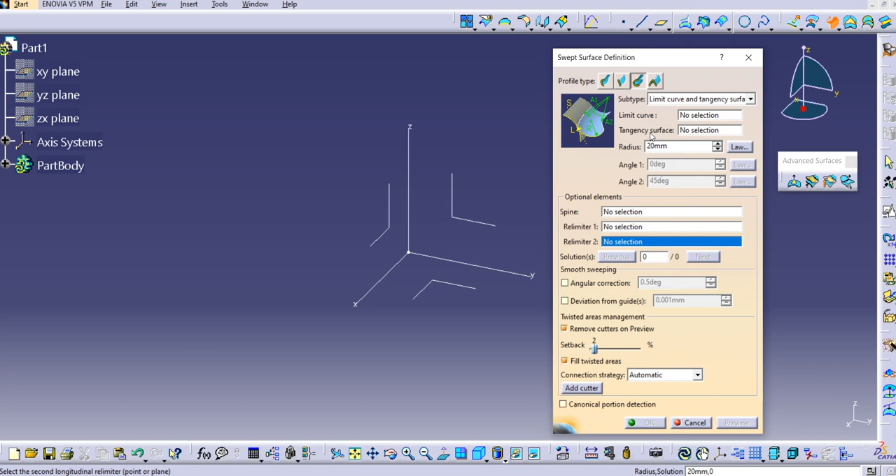L stands for limit curve. In this diagrammatic representation, L is the limit curve and S is the tangent surface. The radius we can provide based on requirement, and we can adjust these angles accordingly. Let's cancel this and first create the limit curve and tangent surface so we can practice with a practical demonstration.

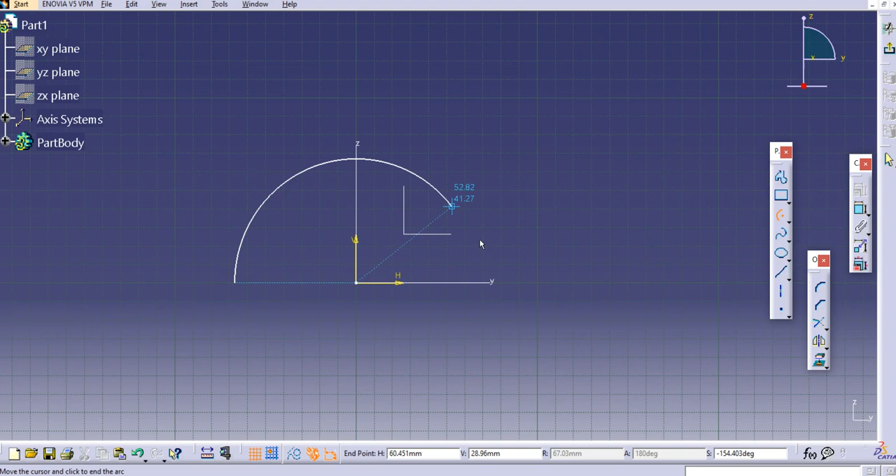Let's select the positioned sketch, and I'll create a tangent surface first. We'll draw on the front plane using the arc tool. Select the center, then the first point, and the second point. Let's provide the dimension as 80, then exit the workbench.

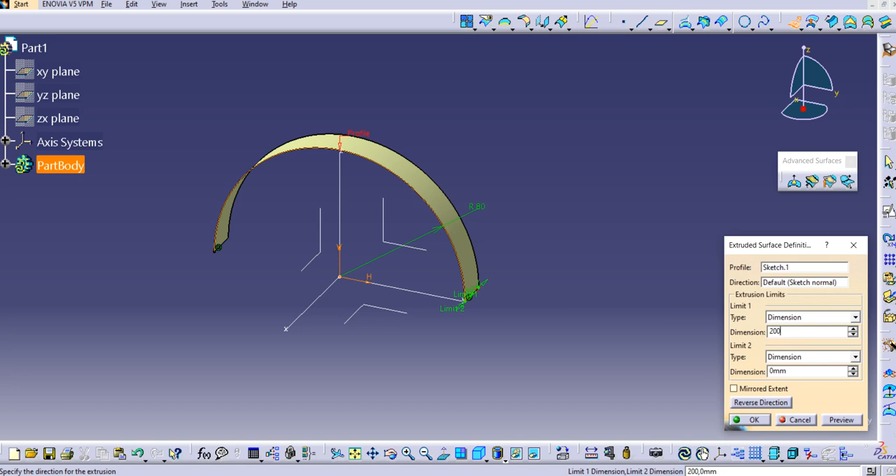Now we'll use the extrude command to extrude this profile. Just use extrude here, and you can see the preview generated automatically. Let's reverse the direction and make the dimension 200, then click OK. Now we have our tangent surface ready, which is also our limit surface.

We can make use of this. Now we have the inputs required for this sweep type, so let's go for it. Click on Sweep - the Swept Surface Definition dialog box comes up. Select the last subtype in the circle profile type: limit curve and tangent surface.

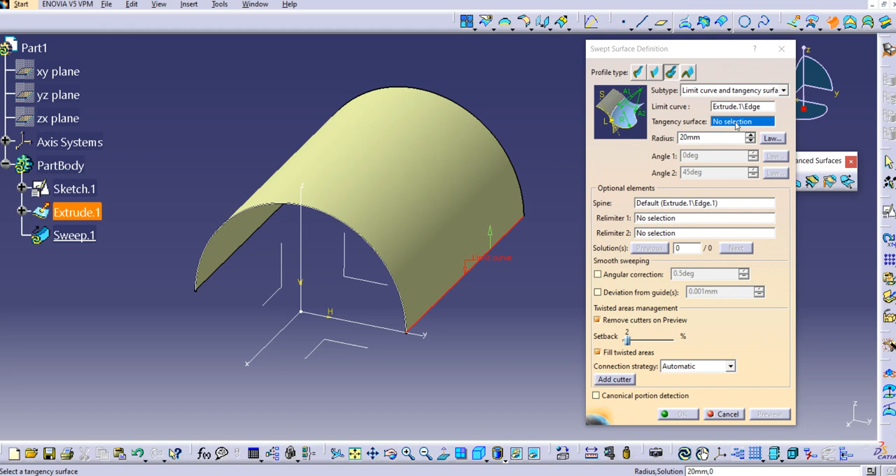Select the limit curve - you can see it from the surface, this is the edge of the surface. Just select this edge, and then select the tangent surface, which is our tangent surface.

Let's try to preview it. You can see the sweep is created here. If you click OK, you can see the sweep surface is created.

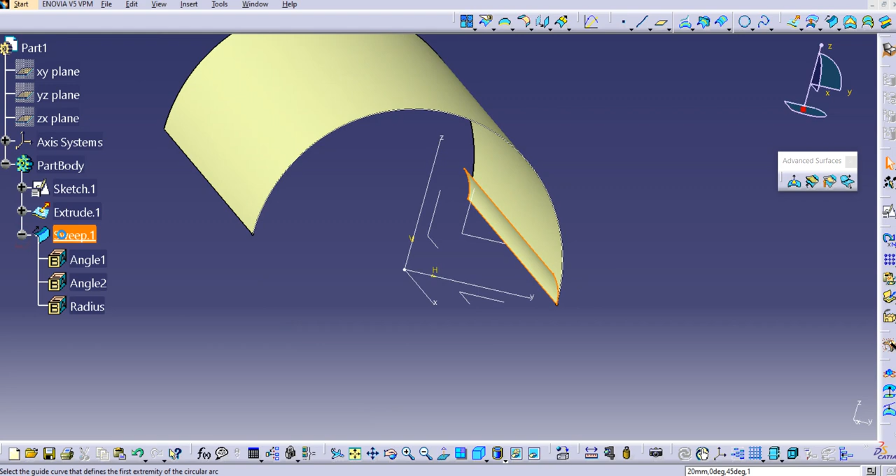Now we have the solutions again, so we can use them. Just double click here - you can see there are two solutions, and this yellow portion is going to remain. If you click preview and OK, you can see the yellow portion remains.

Let's double click here and change this radius to 50. You can see the preview, and the yellow portion will remain when we click OK. This is a simple command but very powerful to use.

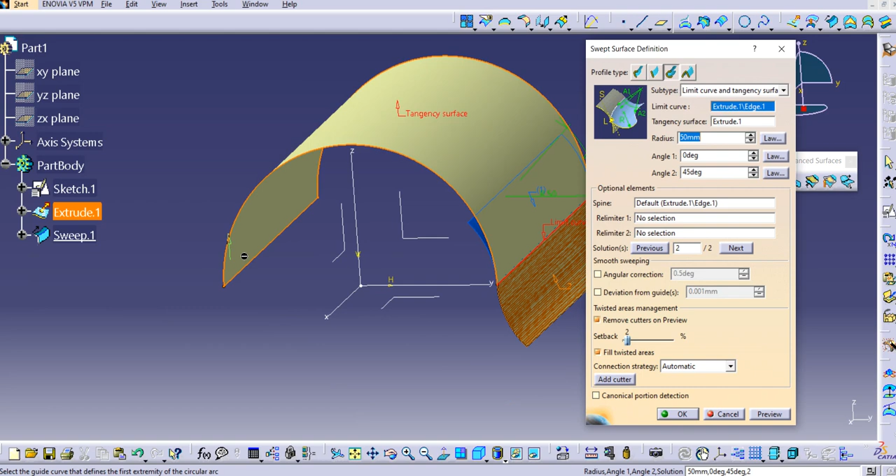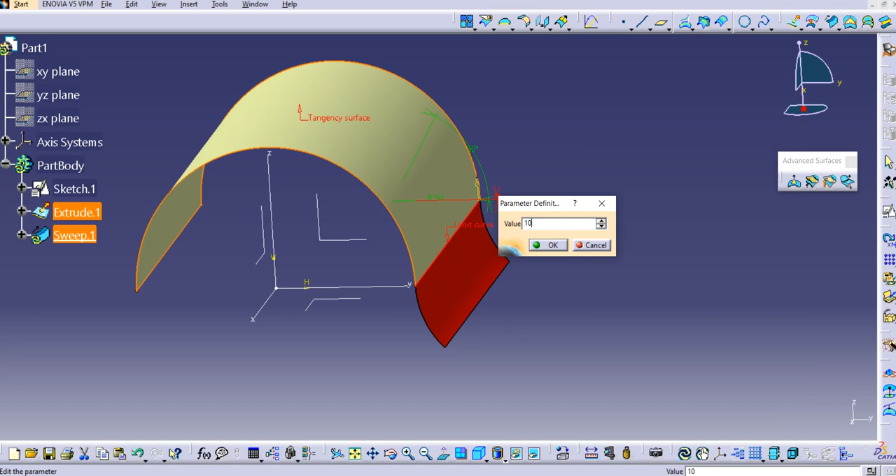If you want to change the angles, let's try changing this angle - you can directly change it from here. Let's change it to 60, and now you can see the angle is 60. If you want to add a gap, let's say 10, you can see this red portion getting removed. If you click OK, the red portion is removed.

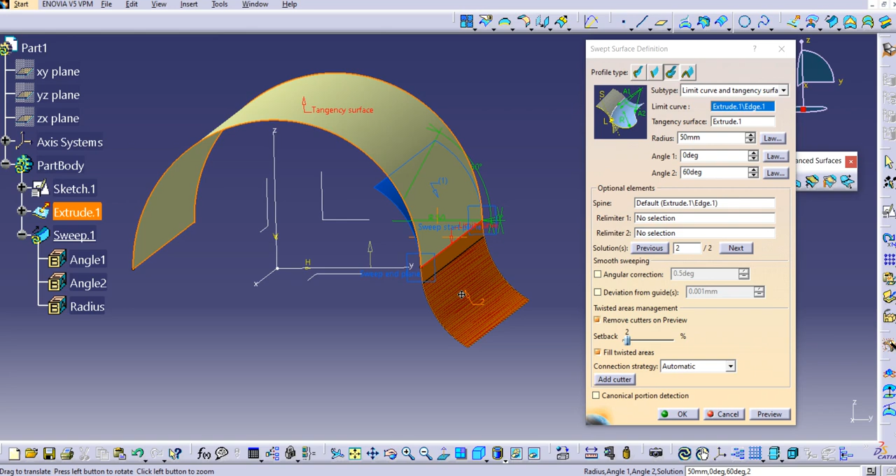Just double click here and let's make this 0 again. Click preview, and click OK.

You can also change the values or parameters from this sweep command itself in the specification tree - you can change angles and radius there. Let's try changing the radius to 100, and you can see it has changed.

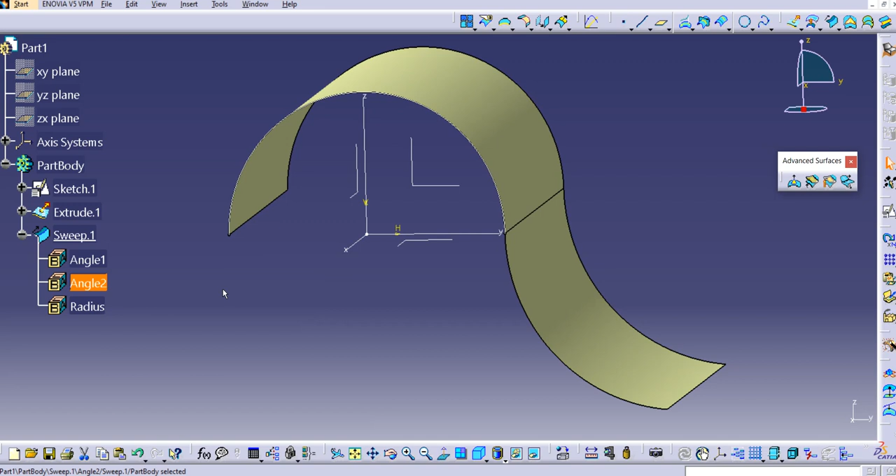If you want to change the angle, let's try 85. Now you can see the angle has changed here as well.

Now let's try to use the relimiters. Let me try one more thing - I think it's not possible here. No worries, let's try using the relimiters now.

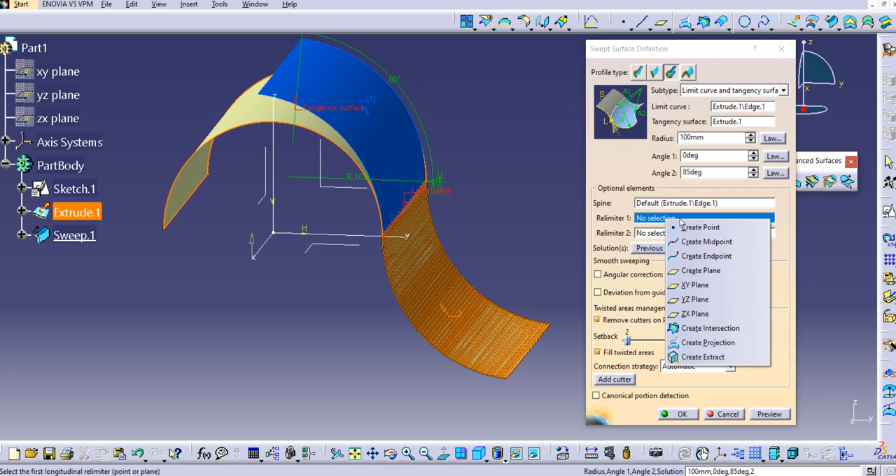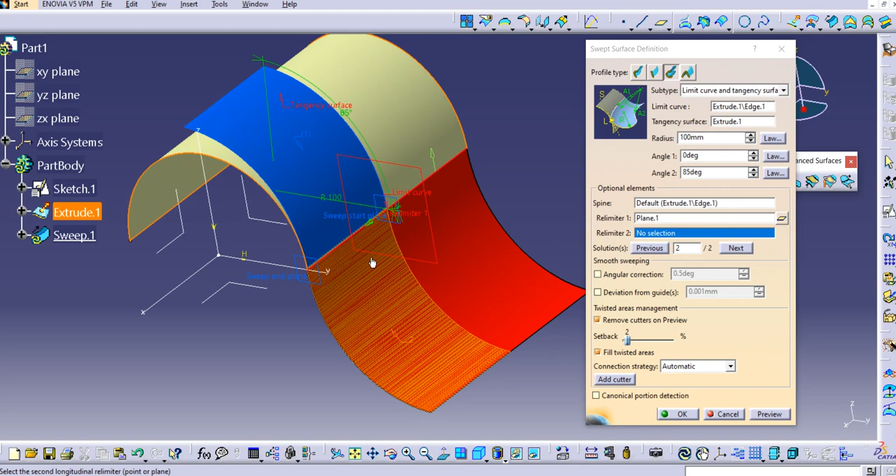Just right click in the no selection field and create a plane. We'll use this edge, which is a curve, and it will by default create a point in the middle - we can change that, but let's keep it as is. Click preview, and you can see the blue portion getting created on this side. Click OK, and if you make this plane show, you can see the sweep is created between this plane and the origin plane.

If you want to add one more relimiter, you can do that. Create a point, select this curvature, then select this ratio - let's make it 0.9. It's creating here, so let's reverse the direction so it's on the other side.

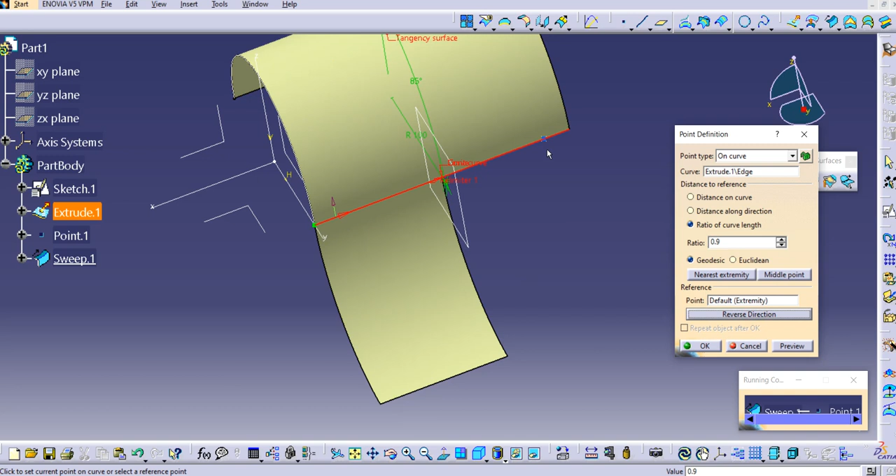Click OK and try preview - here you can see the blue surface preview getting created between these two relimiters. Click OK here, and you can see the sweep is created between these two portions.

In this way we can make use of this sweep type, which is the limit curve and tangency surface. In our upcoming tutorials, we'll cover the next profile type, which is conic. Click on conic and we'll see the different subtypes: 2 guide curves, 3 guide curves, 4 guide curves, and 5 guide curves. When you select 2 guide curves, it asks for guide curve 1 and guide curve 2. Similarly, if you check different options, you need to provide details based on that - we'll cover this in upcoming tutorials.